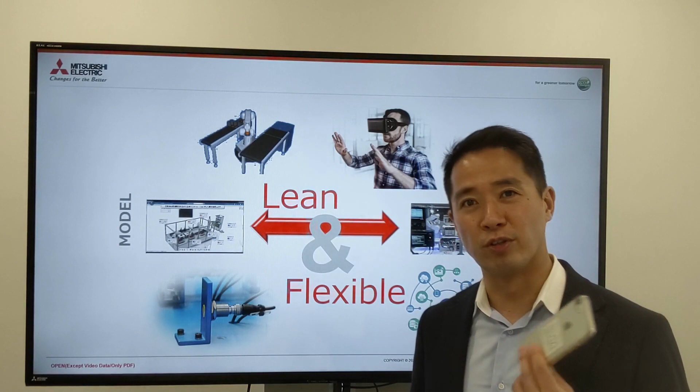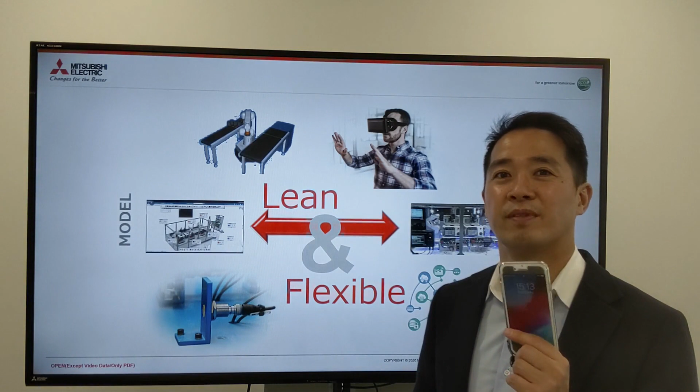Here's an iPhone, and you make the total perfect production line for this. It's probably going to take you over 2 years to make this perfect. But in 2 years, you're probably not going to even make this phone. The new iPhone is going to be a foldable model. Maybe it's going to be on your watch. Maybe it's going to be in your glasses. Nobody wants a 2-year-old, 3-year-old product. So your effort is wasted.

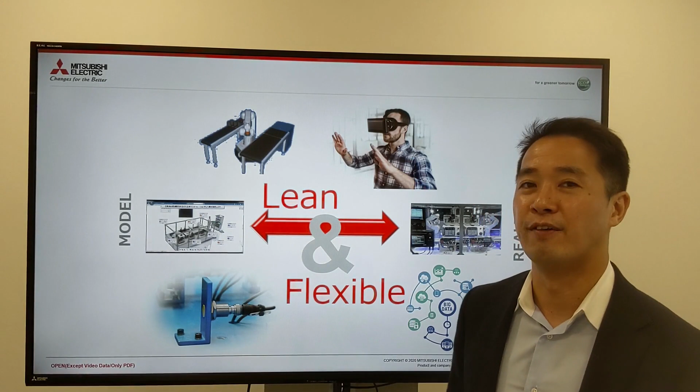In this case, it would probably even be better to use humans to make the product to have a quick release to the market. And you have to have a flexible production line. Everybody likes customized product, your own color, your own memory, your name engraved in it. So you have to have the capability to make multiple products on your production line. And that's why your line should be very, very flexible right now.

So at the end, the final goal of manufacturing is not installing IoT. It's not installing Industry 4.0. It's making your production line lean and flexible. And if humans or conveyors do the job better, then you should use them.

Lean manufacturing is engraved in Japan's history. You see these words, the Toyota production method, Kanban, Kaizen, Pokayoke, Andon. They all come from Japan. Why is Japan so good at lean manufacturing? Why is it the mother of manufacturing? I think there's a historical background to this.

It's because land in Japan is expensive. We have very, very small land, so small island, so land is expensive, people is expensive, and also because we have no natural resources, energy and resources is expensive. But we had to fight with the world. When China evolved as the factory of the world, we had to compete with Chinese products. But we survived. And why did we survive? It's because we tried and tried and tried to find ways to reduce costs.

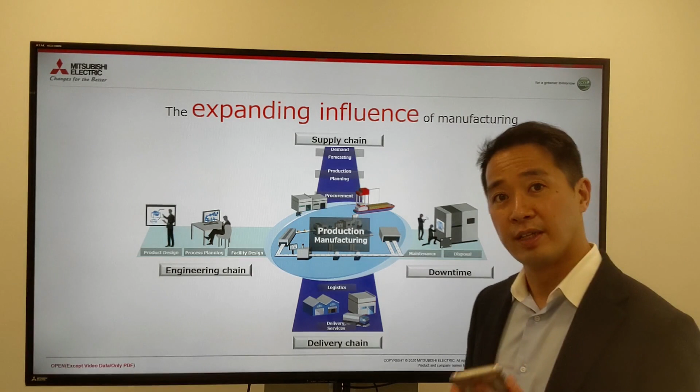In the past, you only had to think about the factory, but the scope is going to expand. I talked about a phone. In the past, when you wanted to put a phone into mass production, you first design the phone, make a prototype, then you design the machines to make the phone. You built the machines and you went into mass production. And it took a lot of time. But right now, every year, you have to release a new phone. Meaning, you don't have the time to go through that traditional pathway.

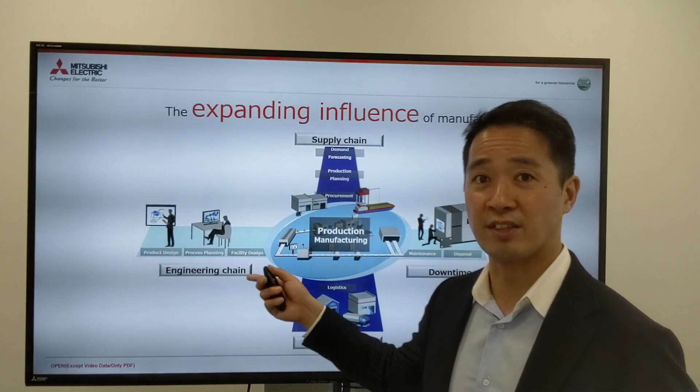When you develop a phone right now, you have to simultaneously think of how I'm going to build the machine, what machine, engineer the machine together, and also engineer the production process together. In order to do that, you have to connect the data with the engineering section to the production line, and that's what we say tapping into the engineering chain, connecting the engineering chain.

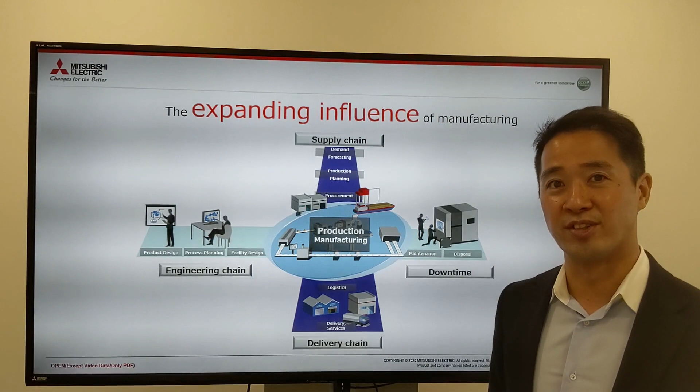You also have to connect the supply and delivery chain as well. Customers nowadays expect when you place an order to get next day delivery. So you have no time to take up a fax, to put in a paper order into the system, and then start production. So you have to connect the data throughout the supply chain as well. Not an easy job, but in order to survive competition, you're going to need to do this.

One important thing we also think about when we put in an Industry 4.0 IoT solution is to dream big but start small. Meaning, of course, you should look at the future and all the possibilities you have with IT, but think, because at the end, it's ROI, return on investment.

You can spend a lot of money investing in Industry 4.0, but if that investment cannot reduce your manufacturing costs, it's meaningless. Why did you put that effort in the first place if you can't reduce costs?

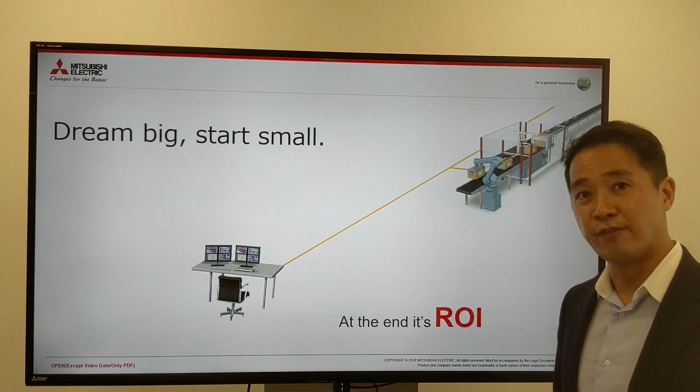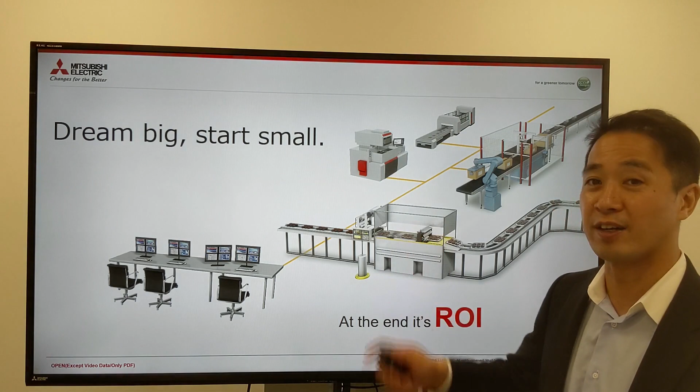So we always suggest have a big idea, but start small. Start with, for instance, a packaging cell. Connect the data here, use AI, use robotics, and see if you can reduce the cost there. If you can actually see the return on investment, then you can expand. You can copy the line, or also expand throughout the line, tackling other products. But only if you can see that the small part works. So it's very important, dream big, start small, and at the end, it's always ROI.

One more thing is keeping it easy. IT, IoT, it's a totally different world from manufacturing. The code we're using is totally different. But at the end, who's going to use this technology? It's going to be the staff, the workers on the factory floor. And if they cannot use this technology, if it's too difficult for them, this is also useless.

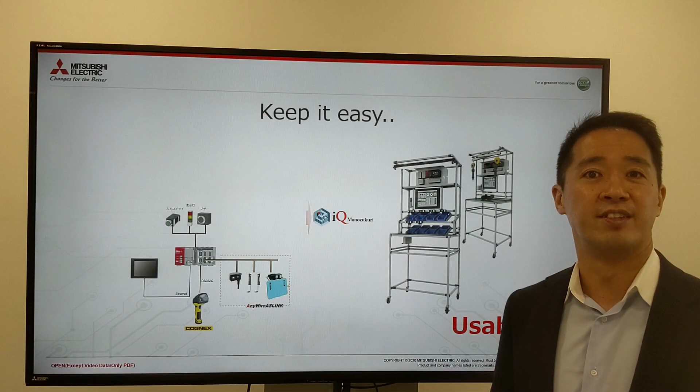And that's why when we put installations inside, we say, okay, it has to be at a touch of a button. You just touch a button, the AI tells you the answer. You have to keep it simple, or they're not going to use it, or they can't use it.

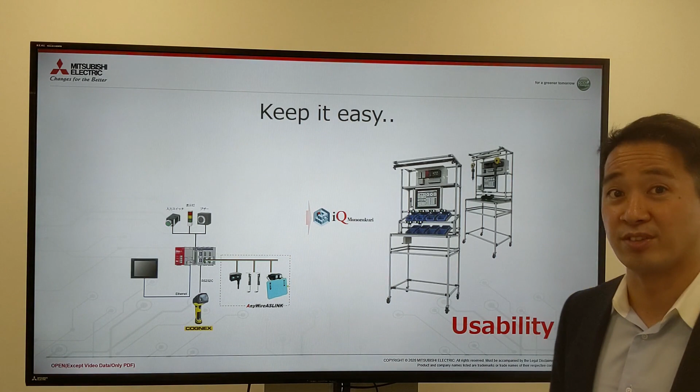I want to go through a case study of how we implemented IoT into our factories and robots into our factories, and what we learned from it.

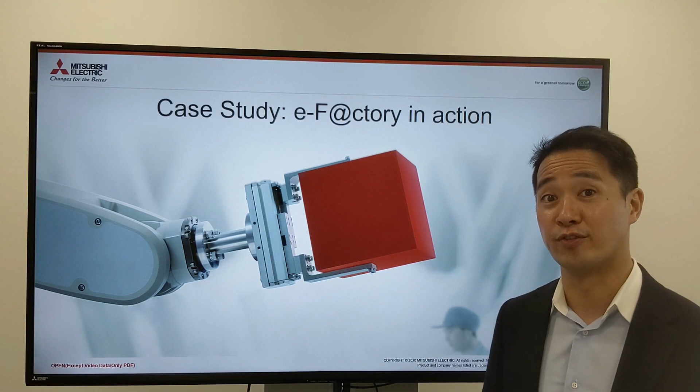We'll first start with a no-fuse breaker production line that we had in Fukuyama. The issue with this production line is that it had what we call little short stops. A robot could not pick up a part properly, so the production line would stop. Or too many parts got crammed into the production line, so it stopped. And the production line would stop several times every day.

So in order to improve productivity, we wanted to reduce the amount of short stops. But the problem is, at the same time, we need to do production. So every time there's a short stop in the production line, a worker would go there, take out the part, and restart the line. If he didn't do that in a fast manner, the line would be stopped and our productivity would go down. So the first effort was always to resume the production line.

But in order to really improve this line, we said, okay, we have to find out where the short stops are happening, in which production line, which process, and when making which product. If we don't find that out, we're not going to be able to improve the efficiency of the production line.

So we did it the old way. We had the error data information in our machines, so we went to the HMI, put it on a CF card, took all those 20 CF cards to our PC, put it into an Excel file, and made a graph. Okay, here's where the production line should be stopping the most.

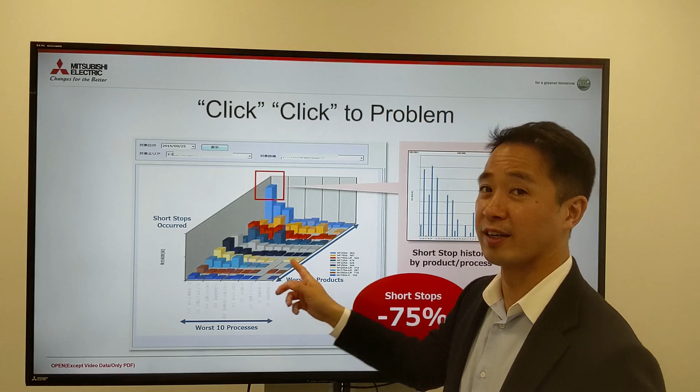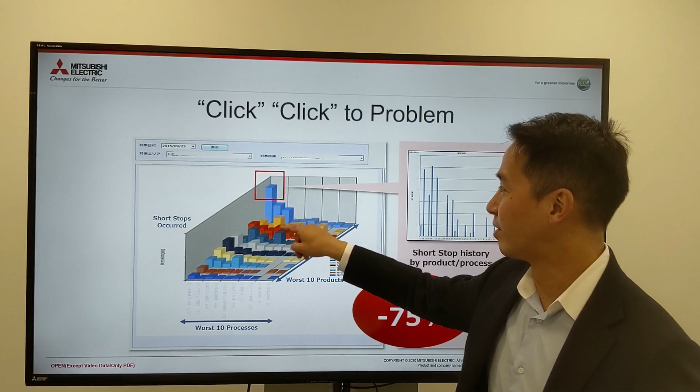I talked about how when you use IoT, you should have a goal. We had a simple goal, which was to make this screen: how many short stops occurred, in which process, and for which products. If we could find the point that was stopping the most, then we could improve it and move on to the next part where a lot of short stops occur. So we wanted to keep it simple, and we said, let's collect data so we can make this chart.

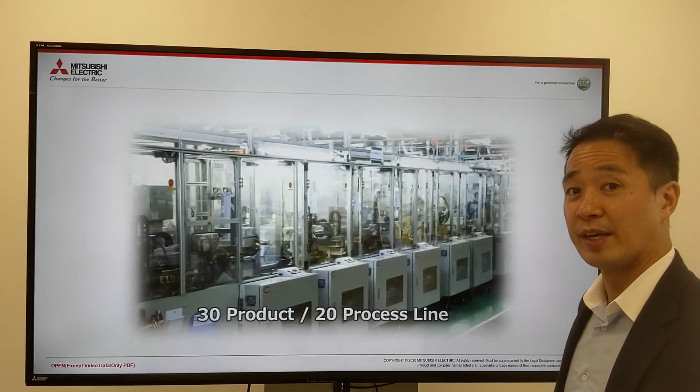This is the actual production line. We make 30 different products, and there are 20 processes in this production line. It's a fully automated, beautiful line with robots and machinery.

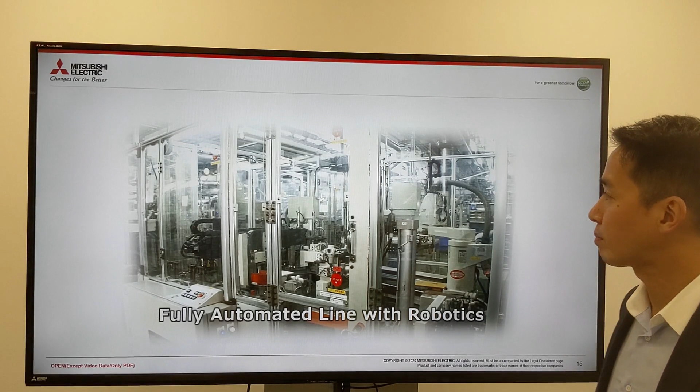We collect the data through a PLC and send it through the network, and we transmit via wireless LAN to our main PC.

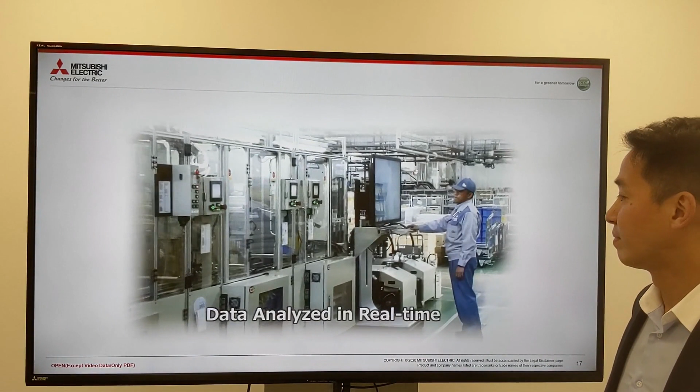The data is analyzed in real time, so the line worker can always see where the key point problems are.

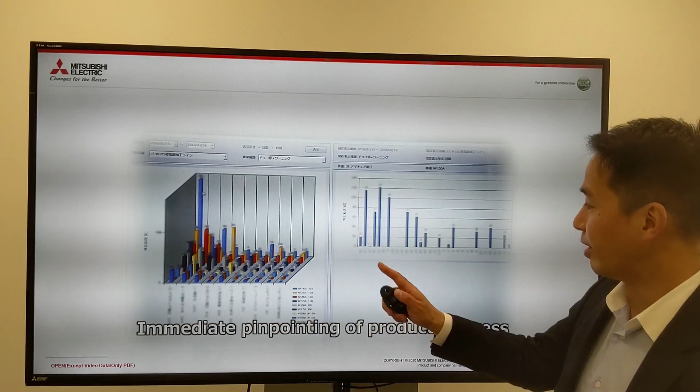This is the actual screen that our factory staff see, and they can immediately pinpoint the product and process. More importantly, they can find the reason why these things happened, and they're constantly looking at this and trying to improve where we have a lot of short stops.

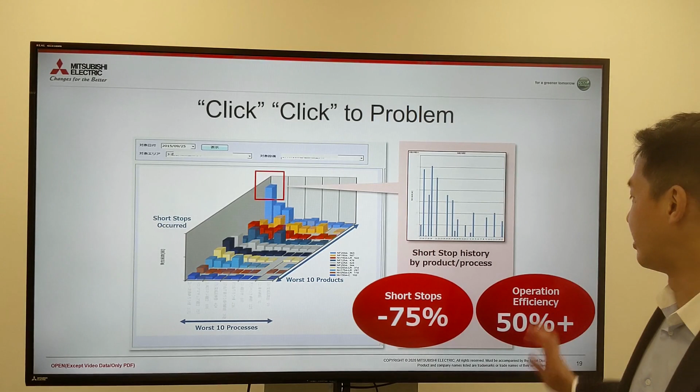You can see the results: short stops down 75%, operation efficiency improved 50%. This is because we were able to shorten what we call the Kaizen cycle.

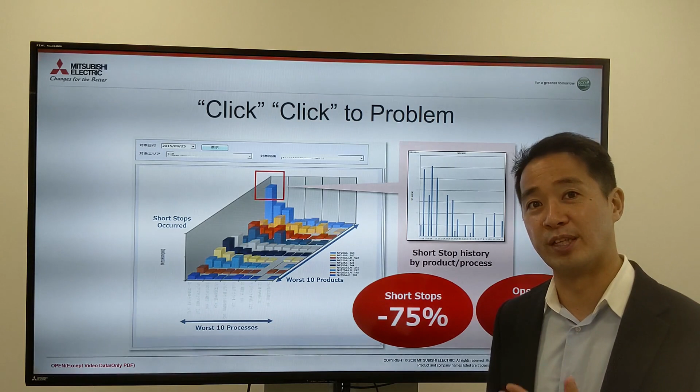In the past, in order to do Kaizen, we had to wait 2 weeks or a month. In this case, everything is real time. We immediately see the problem without waiting 2 weeks, and we can fix it. Then we can go to the next one, speeding up the Kaizen cycle, and it contributed to our operation efficiency.

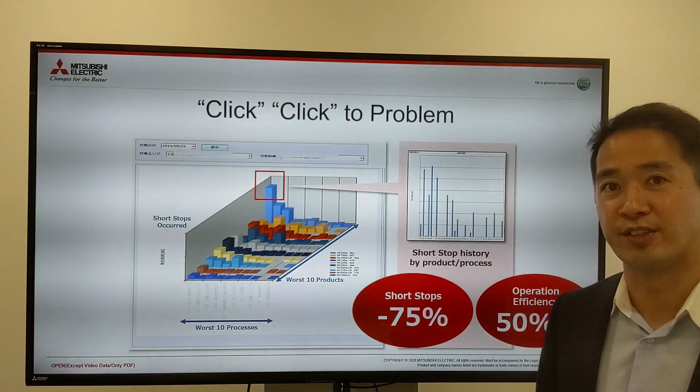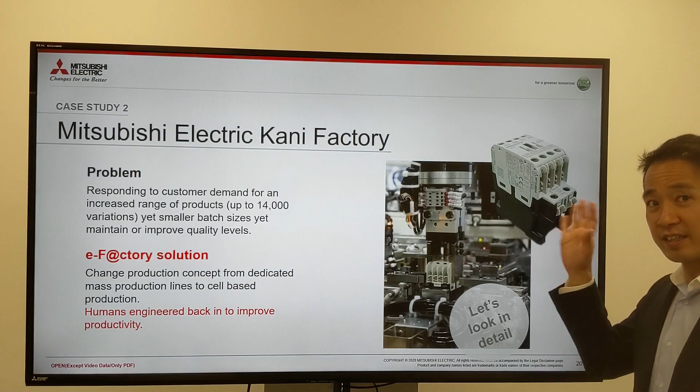It was a beautiful experience, so we said, let's go to the next production line and even roll it out further. So we have a magnetic contactor factory where we have to make 14,000 variations of products. It was very difficult for us to manage this while keeping the quality.

So let's put more robots, let's do more automation there. What's interesting about this story, and I'll tell you the reason later, is we stopped it and threw away the lines, because we found out that actually introducing humans back into the process was more efficient.

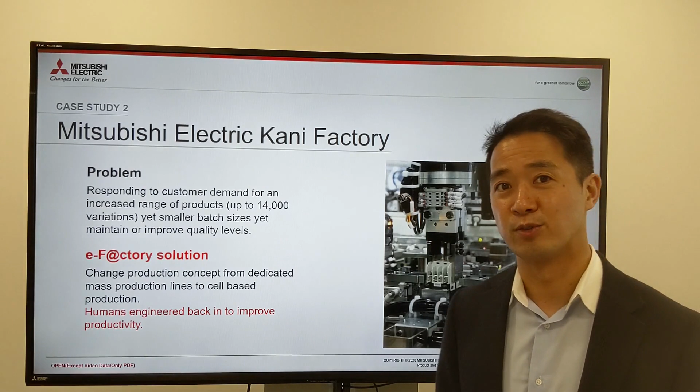There's a lot of beauty about IoT and automation. These production lines receive the work instructions, scan a barcode, and the machine is automatically set up. You have continuous quality control, meaning because you're testing real time and saving the data real time, if there's a problem you can immediately stop the process.

You're recording all test data and keeping traceability, so if there's a market failure, you can go back and pinpoint that this product was made by this person, at this date, at this time.

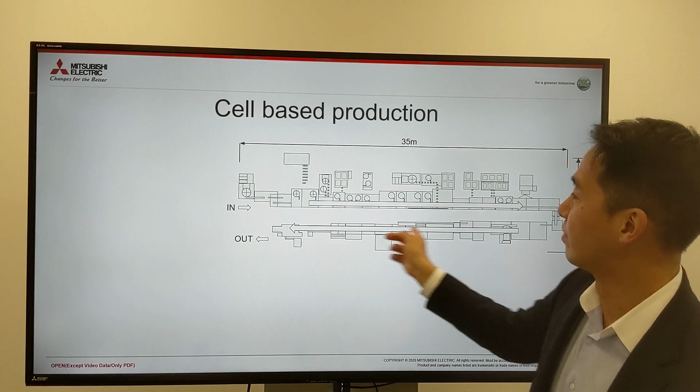This is a chart of the actual production line. It's a pretty big line, 35 meters going this way to this way, so it's about 70 meters. It took up a lot of space, as you can see.

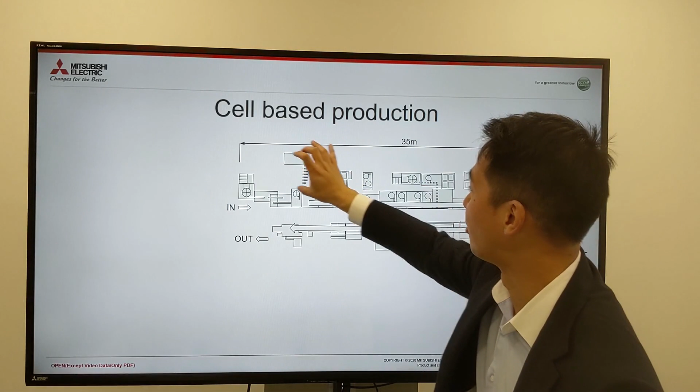This is the main production line where they're making the product, and the circles are the robots, but there's a lot of machinery on the backside of the production line. This is because we were making multiple different kinds of products - we needed different feeders to feed the machines automatically with different parts.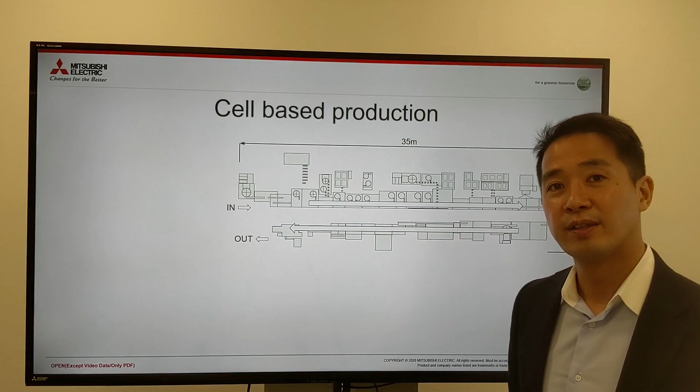It was very efficient, but we had a big problem with this production line. One was that one stop anywhere stopped the whole production line. So if we had a short stop here, and it couldn't pick up a part, all the 100 products on the production line stopped. This was a big issue.

Our solution to this was introducing what we call cell production. You can see the cell production over here - it's a combination of a human worker working with the robots in a small cell.

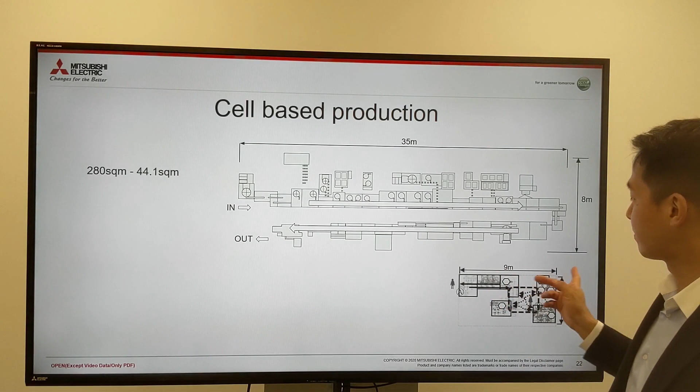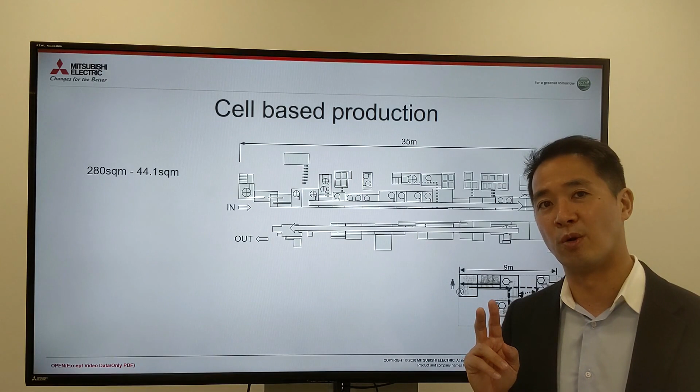The human worker is doing three things. He's kitting the parts together, providing the necessary parts to the robots. The second is to set up the machine, so he scans the order sheet and sets up the machine. And third, he does final inspection.

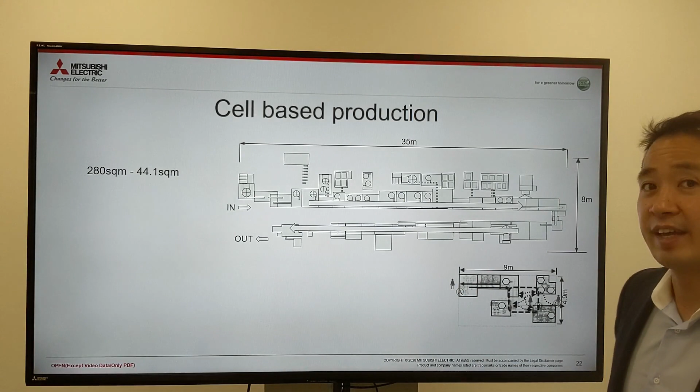Because we don't have the feeders, it saves a lot of space. And it also has a lot more benefits to this.

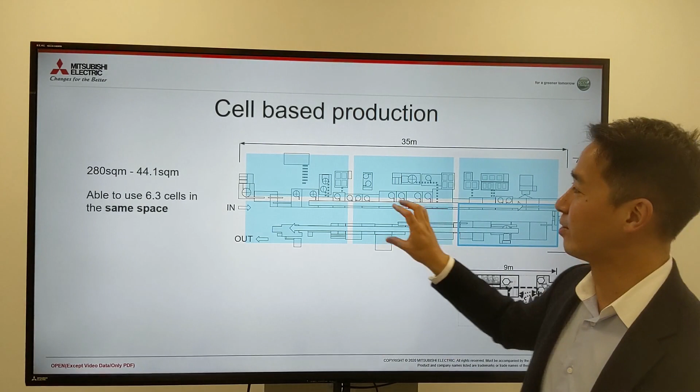We can fit 6 cells into the same space as one production line. This is good because it means we can produce 6 different products at the same time, so more mass customization is possible.

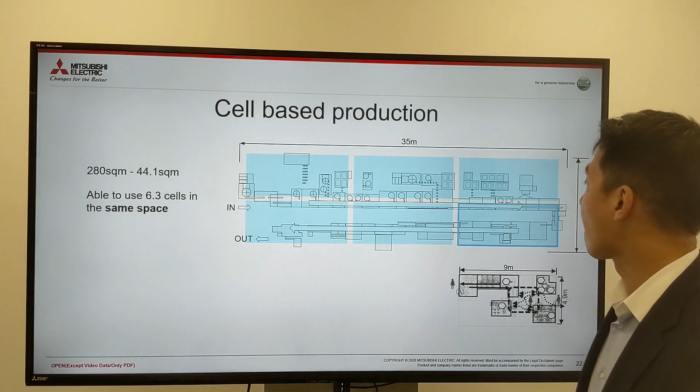The other thing is, even if one production line stops, the other 5 are still operating.

So at the end, we saw the results. Putting people and robots in the right place was better. And we tore down the 2 big production lines, and moved everything to cell production.

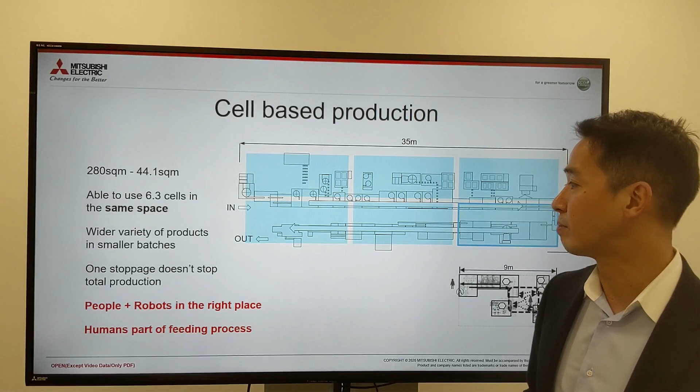Robotics automation was beautiful, but at the end, we found out that migrating people back into the process made us more lean, more flexible, and more efficient.

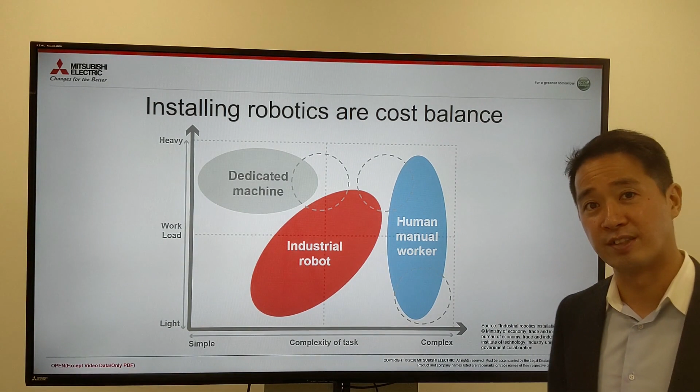So robots are not always the answer. I think there's room for robots, room for humans, and room for dedicated machines. You just have to think about the cost balance and efficiency. Everybody talks about robots versus humans, but I think the future of manufacturing will be robots and humans.

Okay, that's the end of my presentation. Just a few key notes: IoT is not your goal.

Lowering costs and saving energy is the goal. Dream big, start small. At the end, it's always ROI, so please test at a small scale if you can get that ROI. And we think the future is with robots and humans, being lean and flexible.

And I think that's all. I think we made mistakes, but at the end, we only made mistakes because we tried. So I suggest everybody start with IoT, try with IoT.